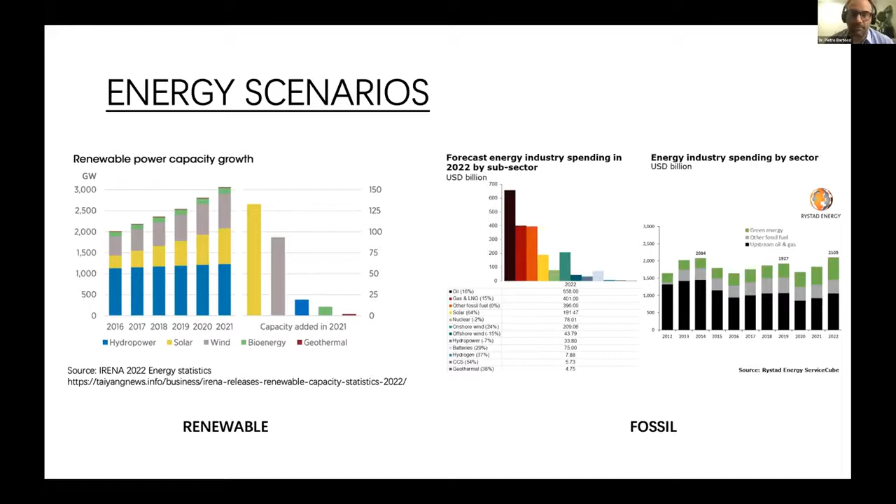For this reason, carbon capture and storage could be a good solution to allow us to transition to new energy sources, while keeping some of the plants we have, as we will see in the first case study I will present. The natural gas combined cycle plants in Italy are a big reality—they are responsible for producing a great part of the energy in Italy at the moment, so it's difficult to replace this in a very short time.

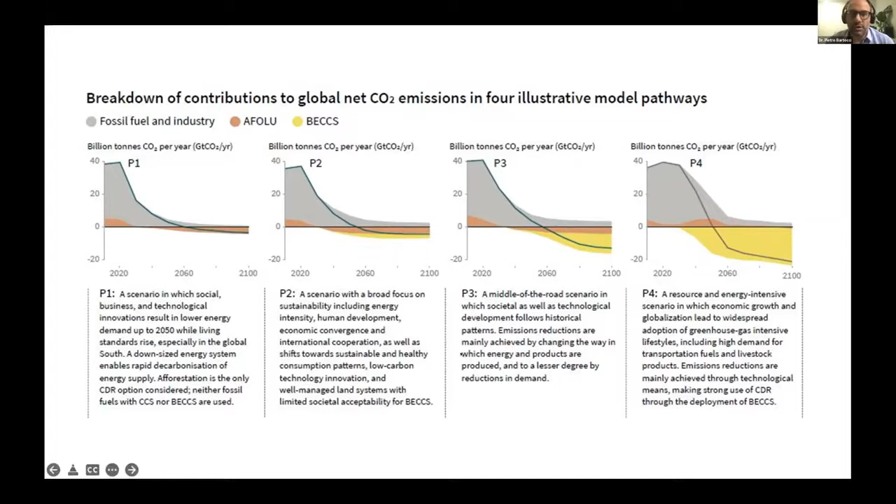Together with carbon capture and storage, we introduce also the topic of carbon negative technologies. Bioenergy with carbon capture and storage is a carbon negative technology, highlighted and promoted by the IPCC reports. The main advantage is that it could allow us to use current technologies working with fossil fuels and still achieve the net carbon emissions targets pledged by many countries.

We have many other different carbon negative technologies. This one is mainly based on the absorption of CO2 from biomass during photosynthesis. When biomass or biofuels, after a conversion step, are converted into energy mainly by combustion in thermochemical power plants, we can store the CO2 underground, achieving net negative emissions. This is the main concept of the technology.

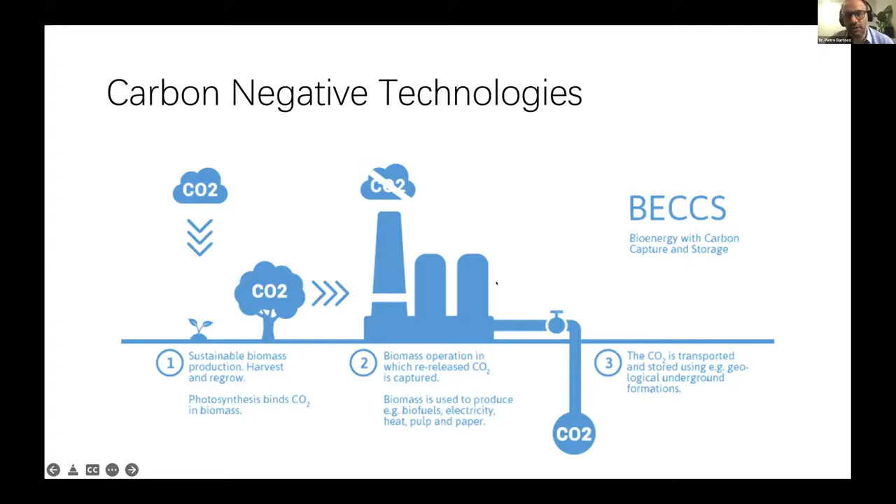As I said, developing this carbon negative combustor required starting with activities we developed at the University of Perugia in Italy with Baker Hughes. Baker Hughes has a quite big production site in Florence, Italy, where they produce turbines with capacities of 12 and 16 megawatts, which we think are more suitable for bioenergy or biomass, because biomass is dispersed across the territory, so we cannot build very big power plants—we have to focus more on decentralized power plants.

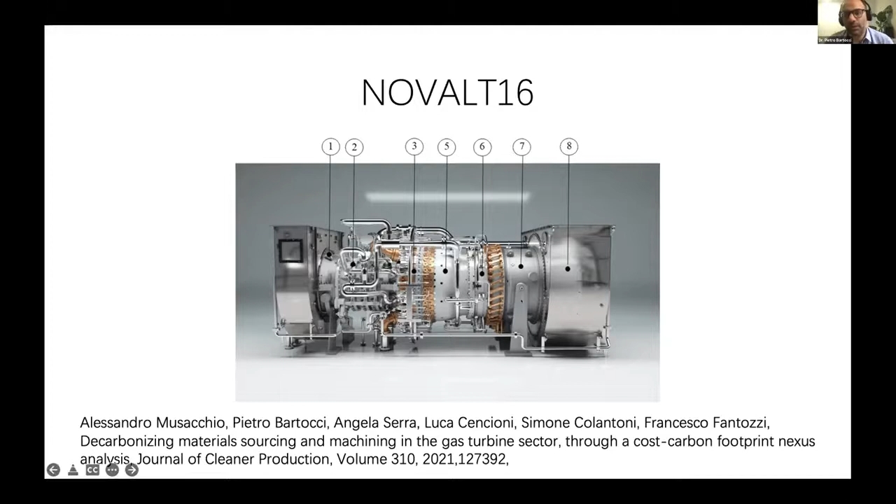With Baker Hughes, we were responsible for tracing all the carbon emissions in the production of raw materials used for gas turbine production, mainly steel, different alloys, and other materials. Together with the company, we started analyzing what happens, since this is a multinational company with a big supply chain—what happens if the supplier of raw materials like steel is a developing country?

And what happens if it is a country with a low carbon footprint in its energy mix—electricity or heat produced with fewer emissions? Here in white we see the emissions correlated with steel production if it's done in Europe, for example, and the black bars could represent developing countries like China and India. The company wanted to know the carbon footprint for all the raw materials.

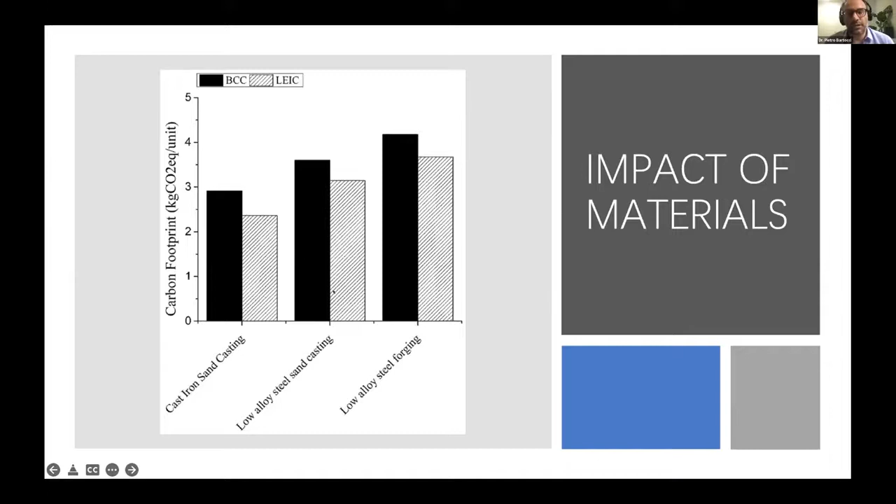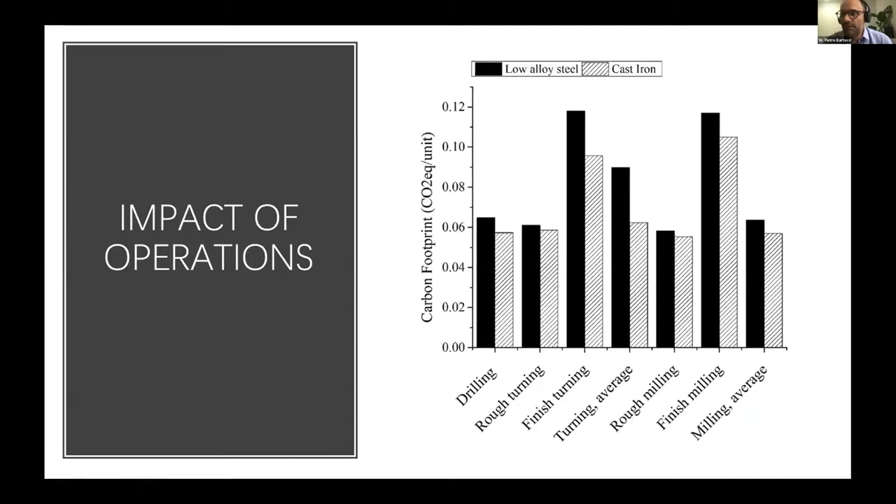Then we developed the carbon footprint for all the operations happening at the Florence plant. In the end, we obtained results showing the different carbon footprints of the different components of the gas turbine, which allowed the company to perform certification of the carbon footprint for the production of two models of gas turbines.

Here we have to explain some aspects better. First, as we know, the carbon footprint of a gas turbine is not focused on production—production is a small portion of the total gas turbine carbon footprint. As we know, the biggest proportion comes from burning the fuel, so it's the new fuel that we have to address. And as we know, the gas turbine sector is mainly shifting to hydrogen.

to achieve net carbon emissions targets. The technology we propose will have to compete on the market with hydrogen, for example, and also oxy-fuel combustion, because there are trends now suggesting that if green hydrogen is produced massively with green electricity and electrolyzers, we will have a huge flow of oxygen as a byproduct of hydrogen production. This oxygen could then be used in oxy-fuel combustion.

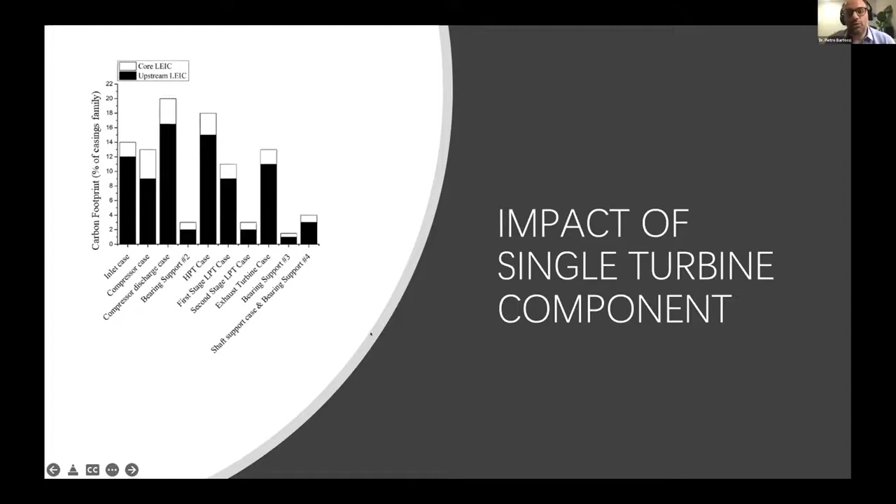We are well aware that the technology we propose should fight to find a niche in the energy transition market where other technologies are also developing. We are also aware that the decarbonization of the oil and gas industry is passing for sure through the use of LCA. For example, other companies like Siemens Energy are adopting it on a large scale. So we think that this work could lead to good results also in the selection of the most interesting technologies.

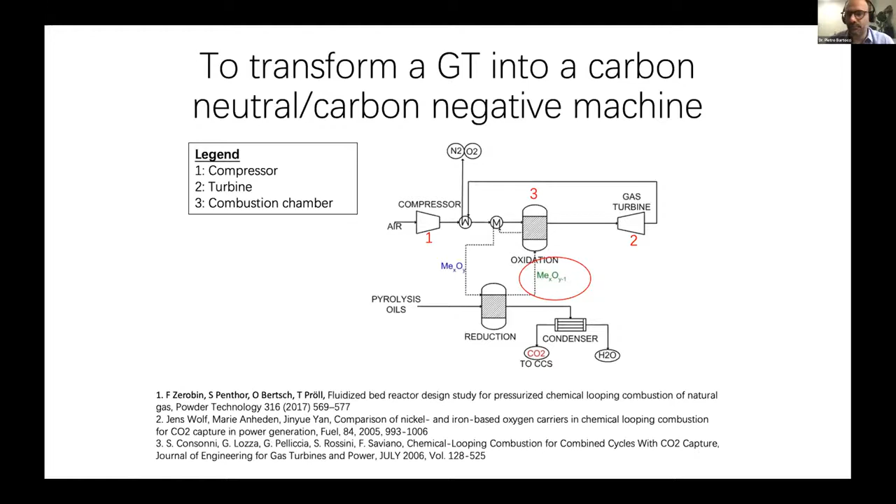Here we see also a former publication of Dr. Wolf and Dr. Yan, who is chair of this conference, by the way, already in 2005. And also a publication of Milan Polytechnic University. So here, for example, is the scheme which was firstly proposed by Dr. Wolf and Dr. Yan. And we know there is ongoing research also at MIT, because given that this conference is at MIT, I thought it was interesting to show the publication of 2018 in Applied Energy, proposing such a similar technology.

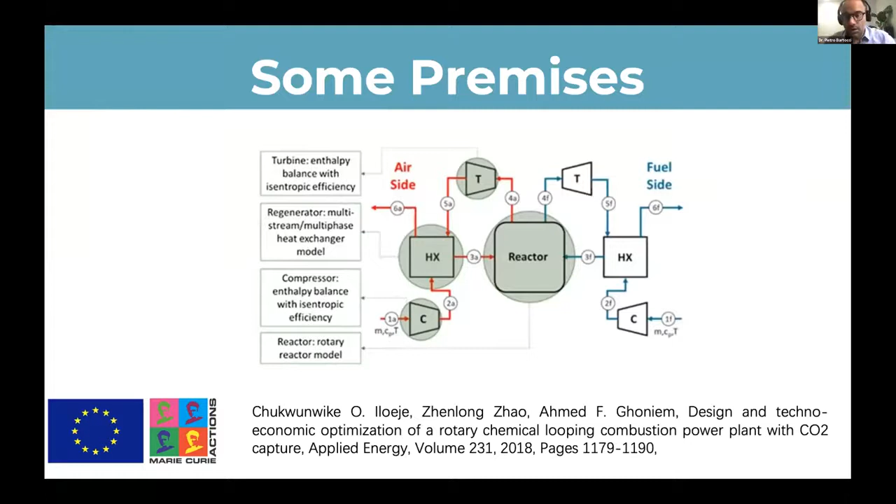Mainly in the case of MIT, a rotating reactor was proposed. So mainly from the point of view of the chemical looping combustor, it was more compact, and maybe it could reduce the investment costs. So why is there need of another project?

So these technologies have anyway some technical barriers that have to be overcome. For sure, we need more efficient oxygen carriers. So as we will see, the oxygen carrier is what transports the oxygen from air to the fuel for the oxidation.

And there is much research ongoing on this, also testing molecular dynamics and all the mechanisms possible to optimize its working conditions. Also, the oxygen carriers need to have low attrition. So during the process, which is happening in most cases in fluidized bed reactors, we don't want the oxygen carrier to produce dust.

Also, because this dust is very probably going to be found in the gas turbine, and this is barrier number 4, I think.

Then, from my point of view, the most important barrier is that if we need a chemical looping combustor to be coupled to a gas turbine, we need to operate the combustor at high pressure, let's say from 10 to 12 bars, and high temperature, maybe 1200 degrees. And here we have issues both with the material of the reactor, that we will see after a few slides, but also with the oxygen carrier, because if we use copper, for example, we know that this copper could give agglomeration inside the fluidized bed.

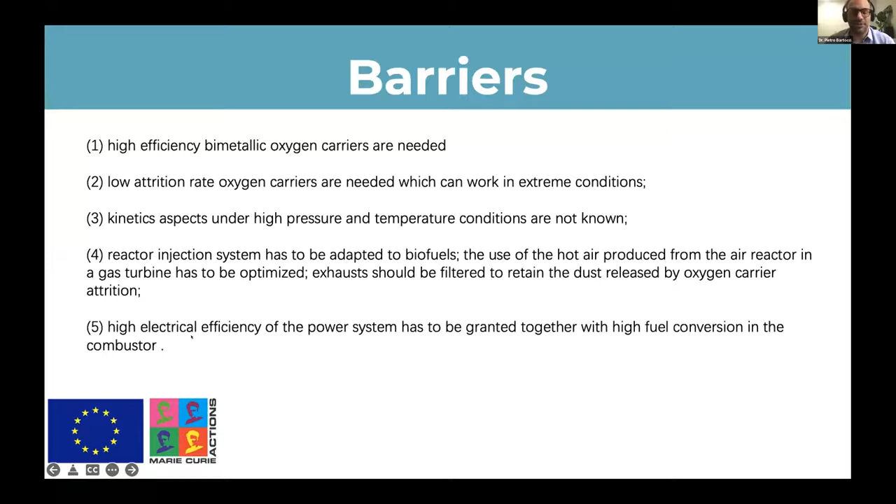Then the major problem is electrical efficiency, but we can maybe discuss this after the presentation, because electrical efficiency is very important for fossil fuels, since we have to spare them. But if we do a carbon negative technology, this means that the more fuel we use, the more CO2 we have absorbed by the atmosphere during photosynthesis. So we can discuss the importance of efficiency. Maybe this could be balanced by the importance of the return on investment, let's say.

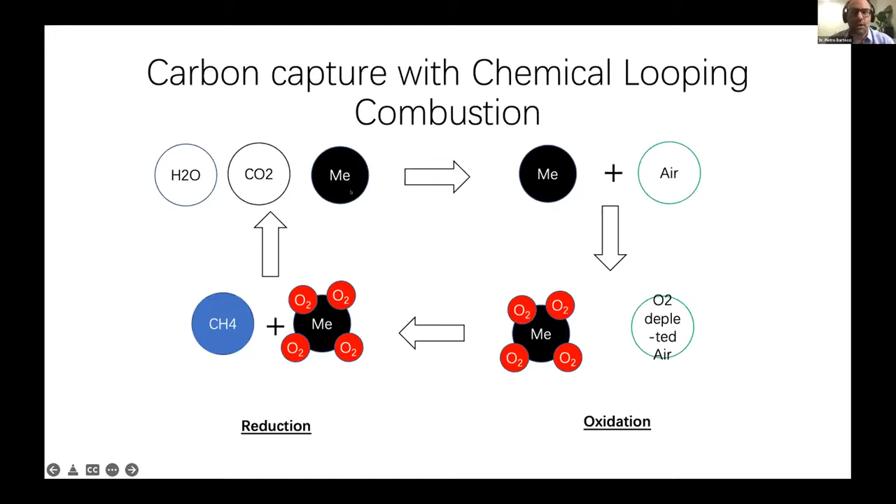So coming to chemical looping combustion, this is a combustion which does not use air. It uses a metal oxide, which provides oxygen to oxidize the fuel, and so it produces a pure flow of CO2 and water, which are the products of combustion, without the nitrogen coming from air. And so we can separate CO2 from water by water condensation and have a pure flow of CO2, which can be captured at very low cost.

So first of all, we made an analysis before presenting the project based on Italy energy scenarios. I said that Italy is deeply focused on combined cycles. And we have some national energy strategies which propose an increase of renewable energy, but show that these natural gas plants will remain, I think, for at least the next 10 to 15 years.

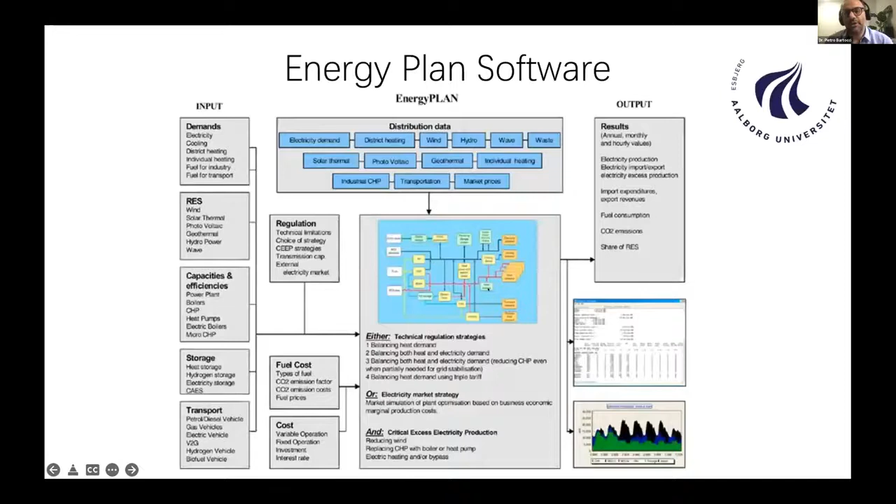So we have made different scenarios using energy plan software developed by Aalborg University. And mainly the energy scenarios were validated on the targets of the Italian energy policy up to 2030. Obviously, this changes quickly. Mainly the policy documents are from before the Green Deal, so we can see that maybe this will change a little, also depending on geopolitical issues about natural gas supply, but it's very probable that our natural gas supply power plants will still be quite important.

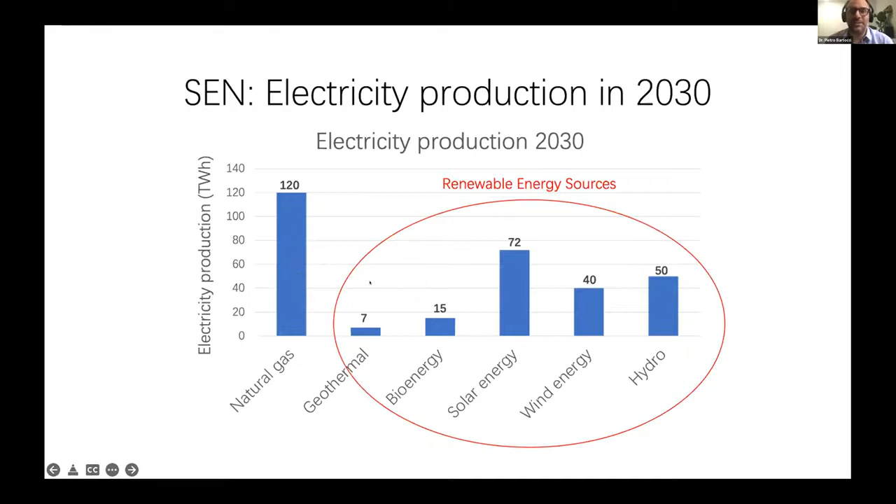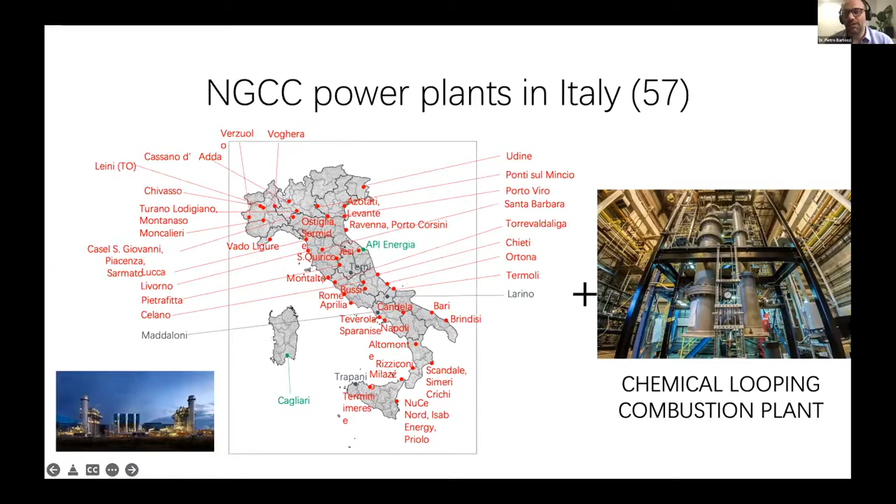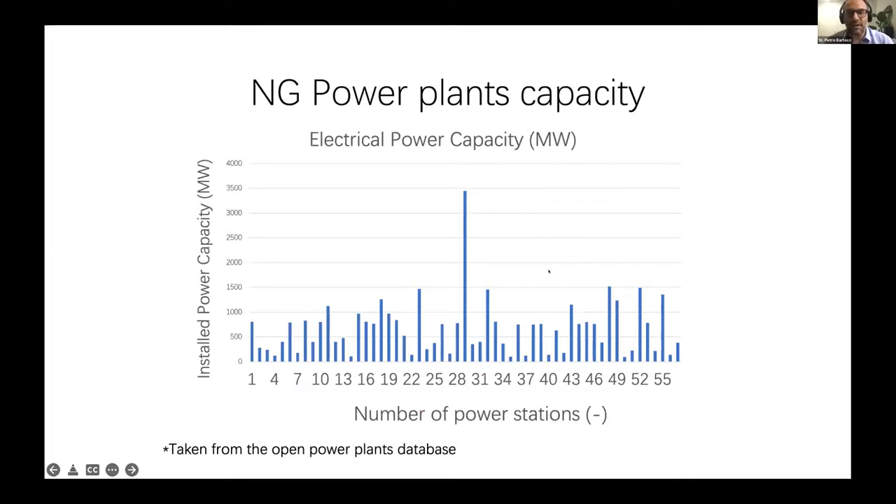These are our 57 natural gas plants, all in Italy. And our first feasibility study wanted to know what happens if these plants are substituted with a combustor, only the combustion part, which is a chemical looping combustor. This is an example of the combustor, the one developed by the National Energy Technology Laboratory. So these are the power capacities of the plants, the combined cycles in Italy, and this is the electricity generation.

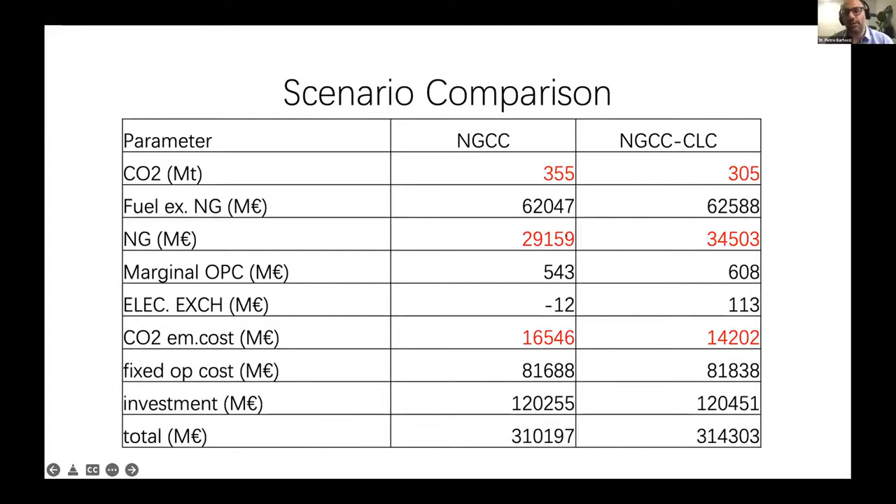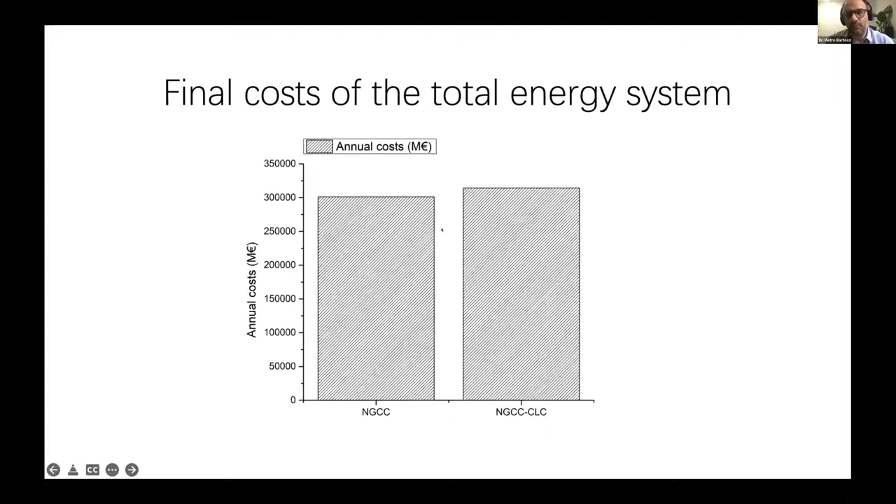What we calculated mainly is how much the CO2 emissions can be reduced and how much it could cost, how much would be the investment to upgrade our current energy system. And you see that the total investment, even if we speak about millions of euros, is not so high if we compare it to

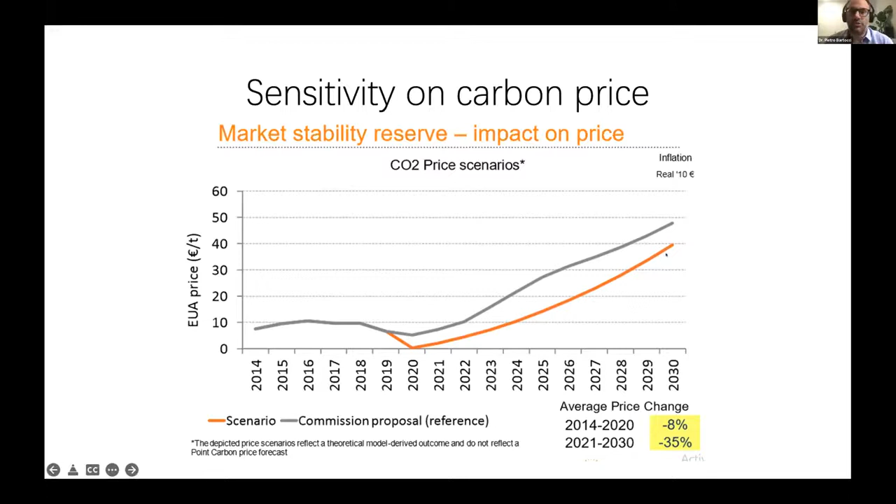the existing energy system now. Obviously, this depends on the carbon price. These were estimates for 2030 that said we would arrive at 50 euros per ton, but we are already at almost the double. So if we consider the carbon credit value, we could see that business as usual, which is orange, could be very similar as an expense in investment and operating costs

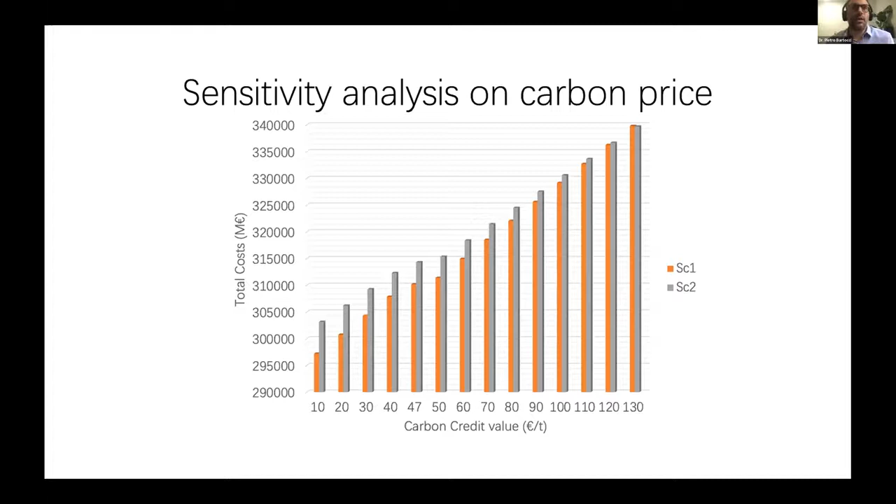compared to the new proposed scenario. This is to say that instead of changing completely the energy mix of Italy, introducing a massive introduction of renewable energy, we can upgrade our natural gas plants in a way that they are carbon neutral. If we use biomass or some fuels, mainly biofuels, this technology can be even carbon negative.

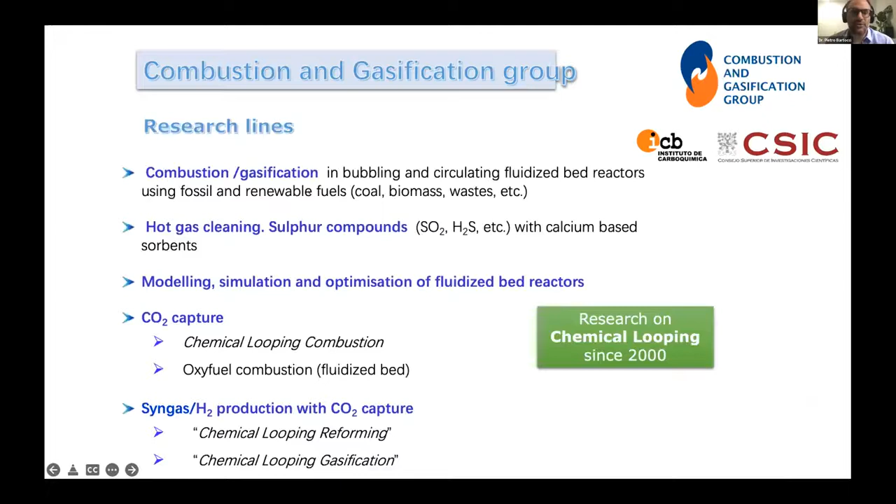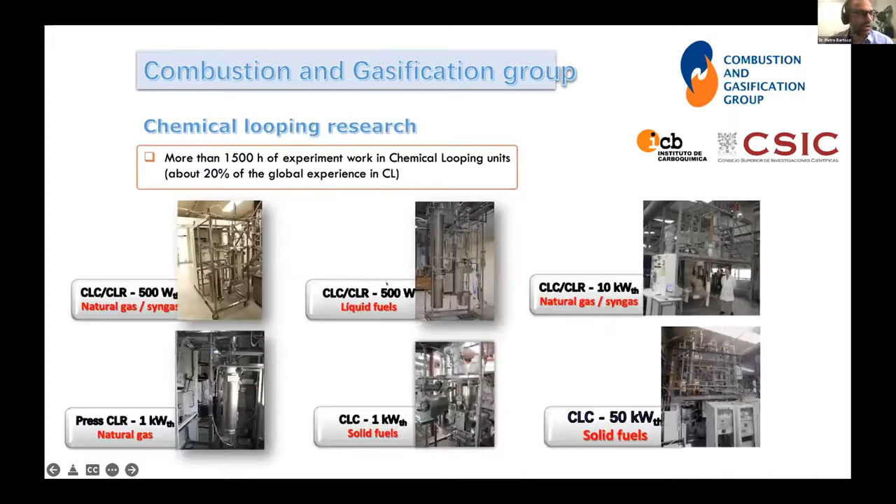So to develop this combustor, I went to Spain. Here is Zaragoza, and our center is mainly focused on combustion and gasification. We prepare the oxygen carrier, we test it in plants, and we do scaling and optimization. These are the batch reactor and the continuous reactor that we have. This I already explained, the plant. And the project is based on the preparation, characterization of the oxygen carrier, batch tests, modeling, and continuous pilot tests.

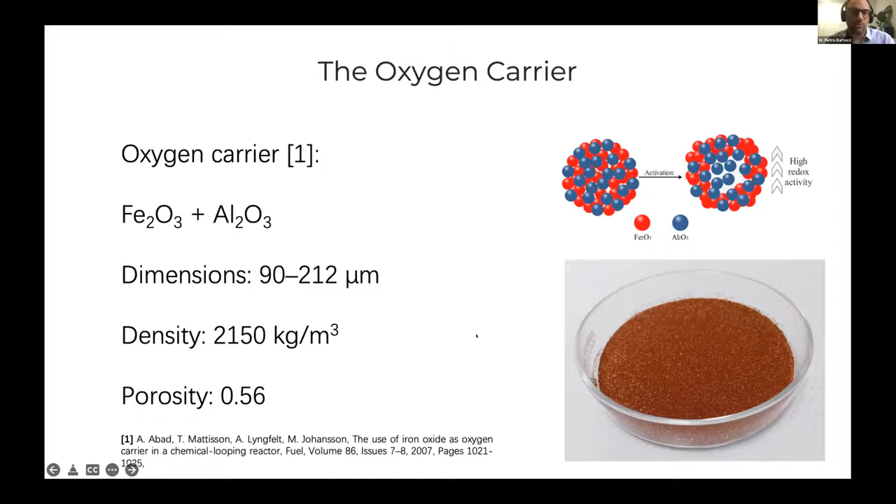So compared to the literature, which was mostly focused on Aspen theoretical studies, we do proper modeling and an experimental campaign to see if this technology can work at high pressure and high temperature. We can say that chemical looping combustors working at high pressure are very few at the moment. There is only one project in Canada working on such a combustor, and another project in Norway.

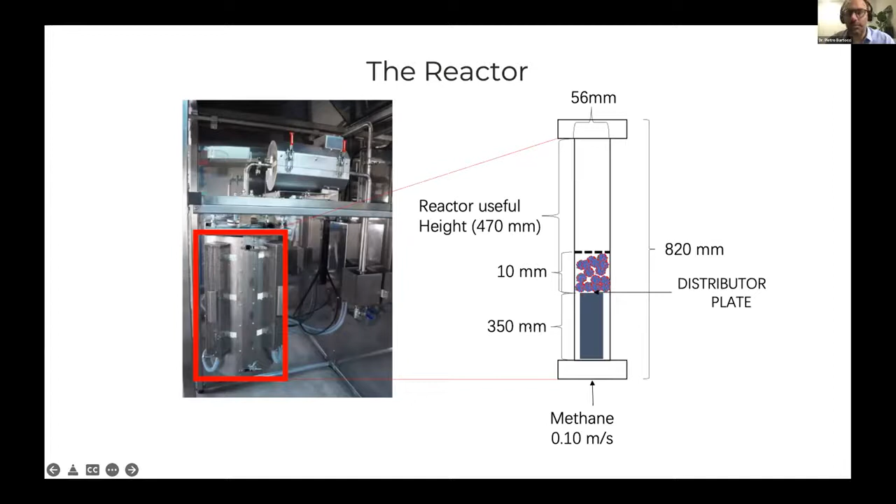So we want to bring more data from a scientific point of view. This is the model we are developing with the MFIX software, developed by the National Energy Technology Laboratory at Morgantown, and NETL is part of the DOE. And this is the modeling platform with the kinetics, which is done in a pressurized condition with the PTGA.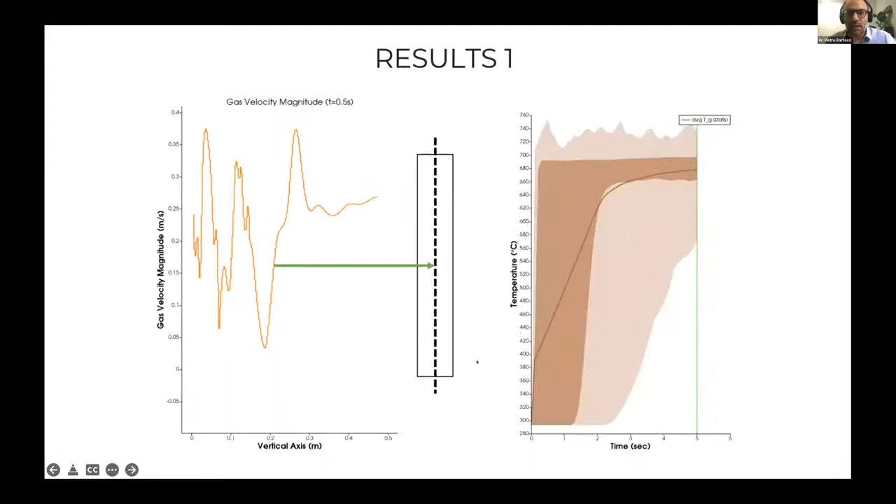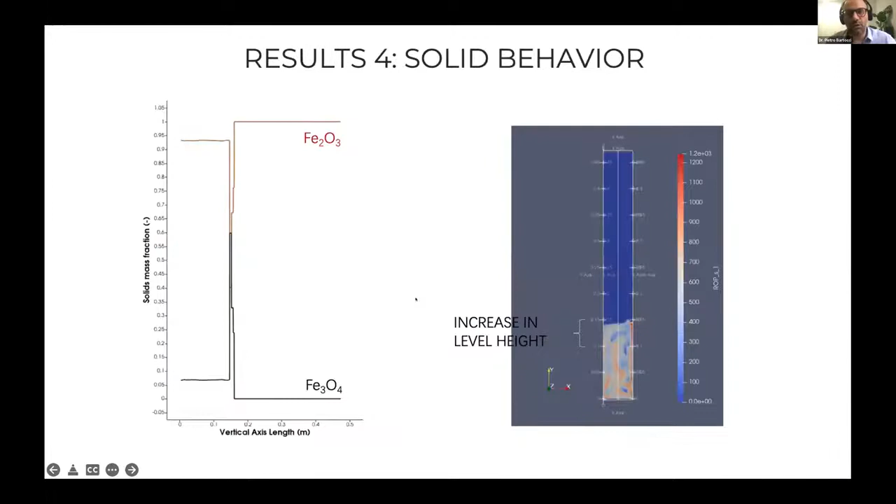And these are some results: the production of gases, how the reactor works, and how the oxygen carrier is converted. The most important result, maybe, is to see more or less how the process works.

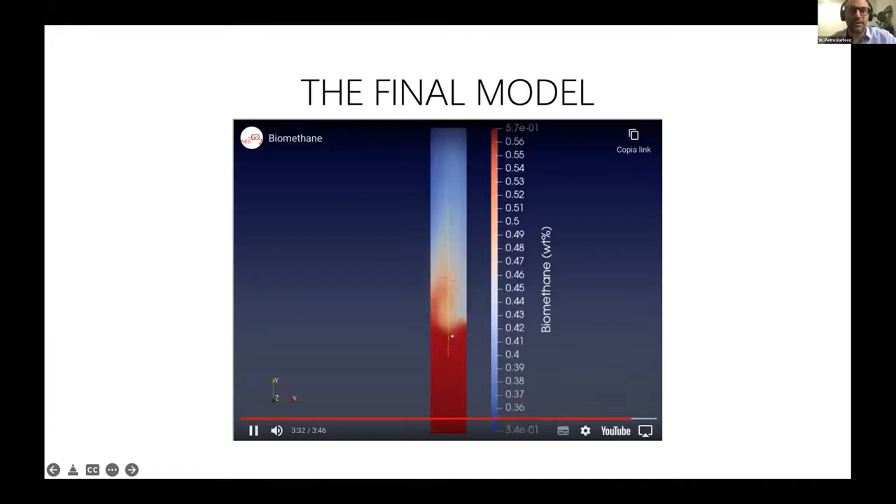This is biomethane coming inside the reactor, and we see how it turns directly into CO2 and water. What we can see is that at around 3 minutes and 20 seconds, the reaction path changes completely. So what we are now doing is analyzing one cycle of reduction, to know how long it lasts, and to fully validate our kinetics scheme.

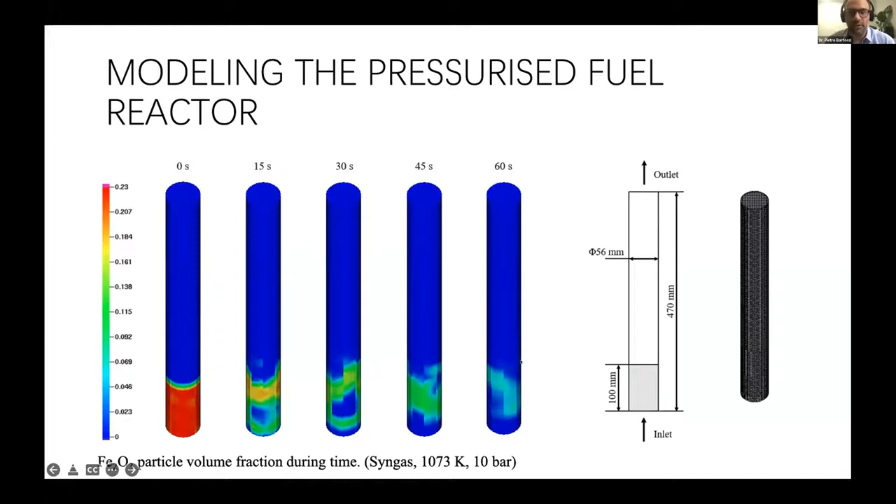The simulation was also done with Huazhong University of Science and Technology. This is our latest work, which was presented at the International Applied Energy Conference 2021. And we validated the model with syngas at pressurized conditions.

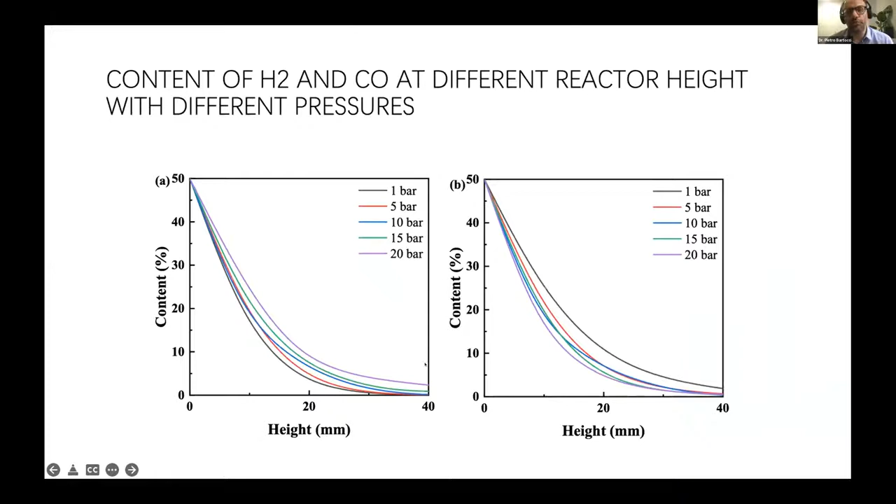So what happens is that during the reaction, we have hydrogen and CO, contained in the syngas, that get consumed because they react at different rates depending on pressure. And this was also analyzed at different temperatures.

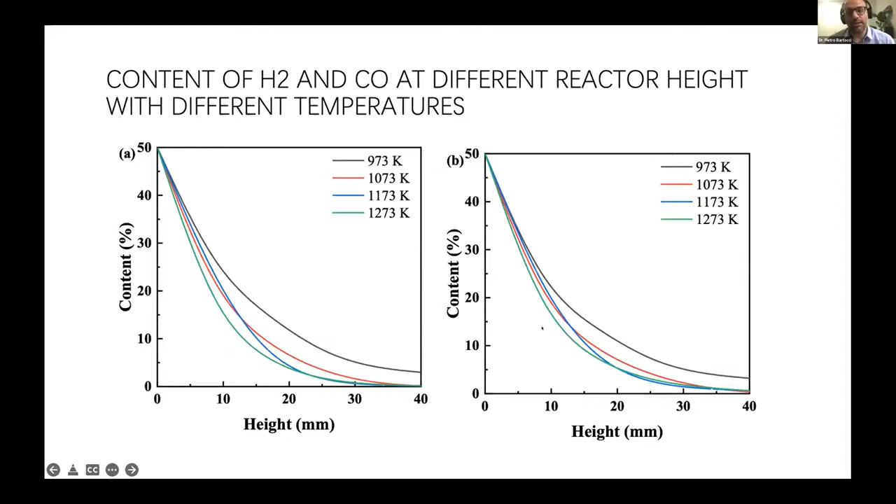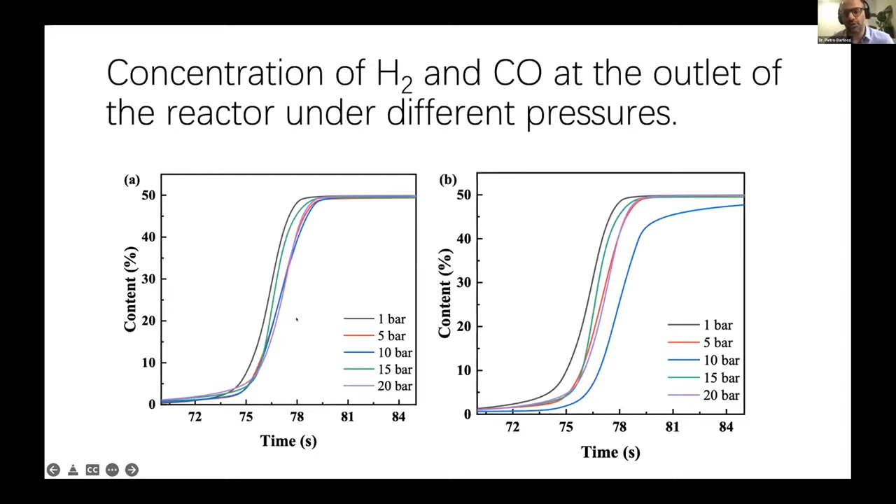Here, over time, we see that the fuel doesn't react anymore. So in this case as well, we analyzed the cycle of reduction and how much time is needed for the oxygen carrier to become exhausted. It is spent.

Our final conclusion on the pressurized model of the batch reactor is that, as was already seen through pressurized TGA tests, the hydrogen reaction in the syngas is very quick. The CO is mostly influenced by pressure, and for hydrogen there's a pressure of 10 bars where the kinetics seem to slow a bit. In principle, we can say that syngas behaves as the sum of the kinetics of carbon monoxide and hydrogen.

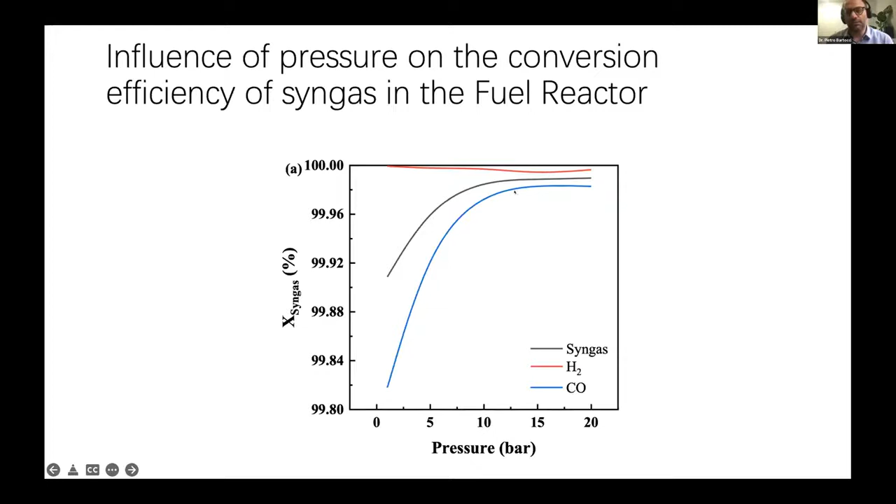From this data, we calculated the solids inventory necessary for our fuel reactor, which is a batch reactor, a fluidized bed. And we discovered an opposite trend from what we expected, because the effect of pressure on the kinetics is mainly to slow the reaction. So if we increase pressure, the kinetics gets slower.

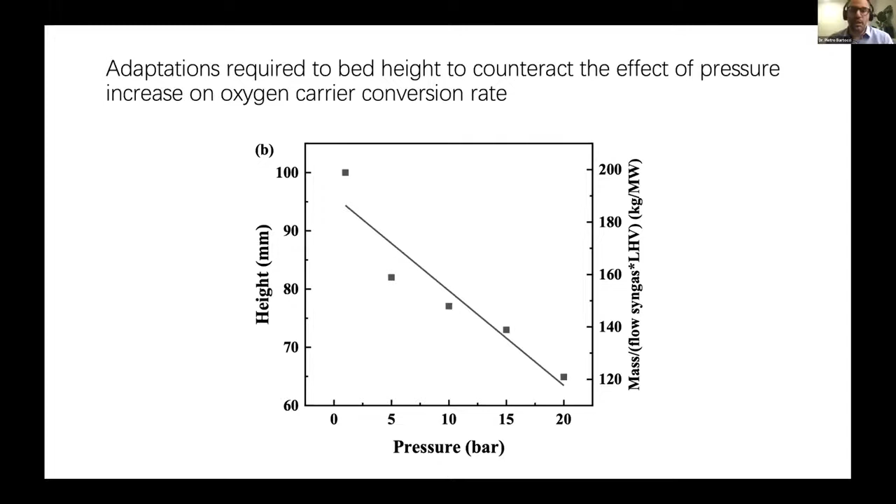This is what was seen in pressurized TGA tests, while in this case, when we also consider fluidization and the effect of pressure on the fluidization of the bed, we see an effect that improves heat exchange, and the heat exchange also affects the reaction itself. So it balances out the kinetics, which is slow. This is at least what we saw from these models, and we are going to further analyze this on an experimental scale.

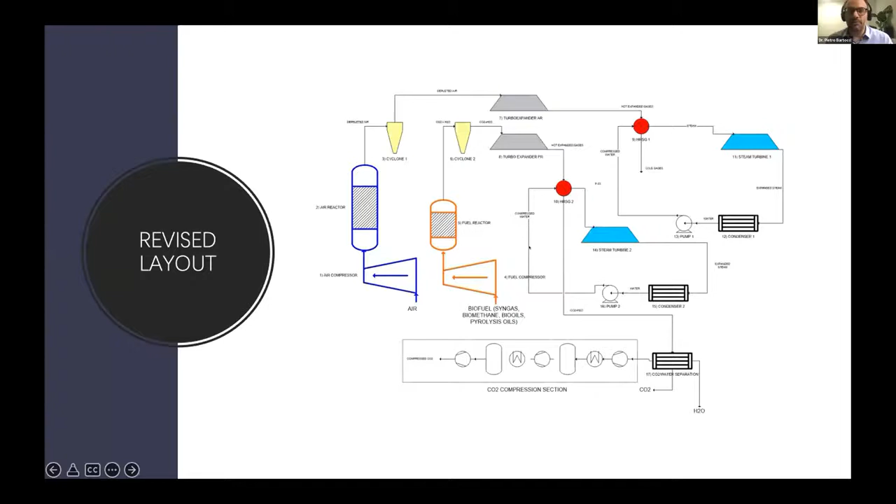This is the final plant that we want to propose, which is quite similar to the previous one. We are optimizing it with different software platforms, so not only Aspen, but also CFD modeling.

What we tried to develop is a procedure to design such combustors. While these combustors are usually designed based on the primary energy, the power of the combustor, in this case we have shifted our interest to the gas turbine.

So we first choose a gas turbine, then we calculate the air mass flow that should pass into our combustor, and we calculate the fuel mass flow based on stoichiometric combustion chemistry. We calculated the oxygen carrier circulation rate, and so on, and slowly design all the plant.

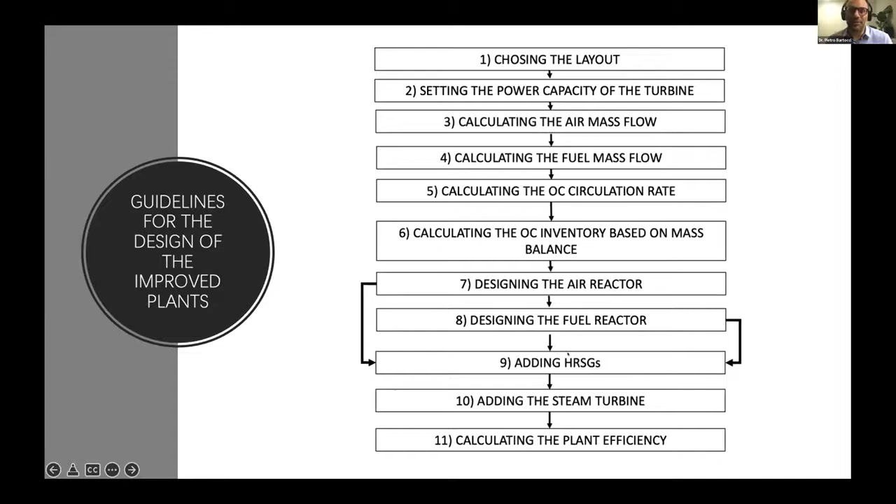This is a completely new methodology. We have also noticed that to optimize the whole plant, a key parameter is the excess air in the air reactor. If we increase this, for example, from 1.2 alpha to 3 times excess air, we have two positive effects.

One is that the excess air is going to cool the air reactor and provide the optimal temperature. The other is that we can maximize the power production at the turbine and reduce the use of fuel. So this is how we will make it.

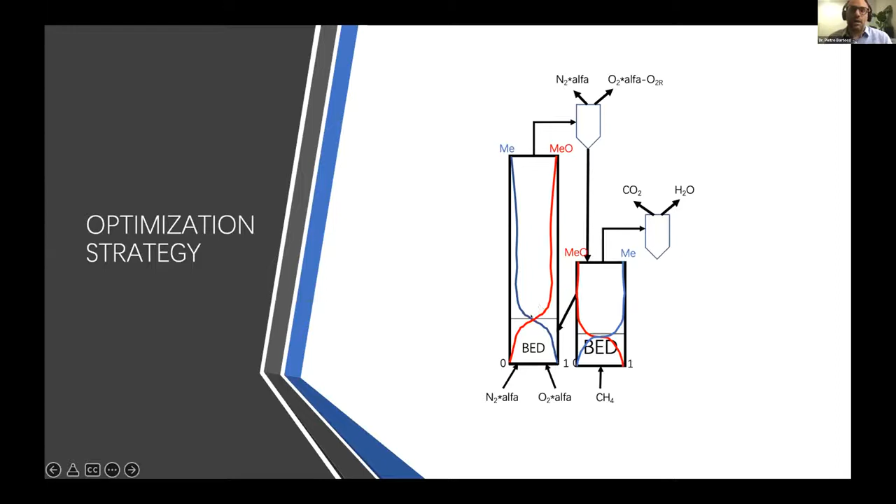Our Aspen optimization is mainly based on two equations, at the air reactor and at the fuel reactor. Obviously these are connected, so the heat for the fuel reactor, which has endothermic reactions, is provided by the air reactor. We can make these two terms equal, and in this way we have only one variable to optimize, which is the excess air, as I already said.

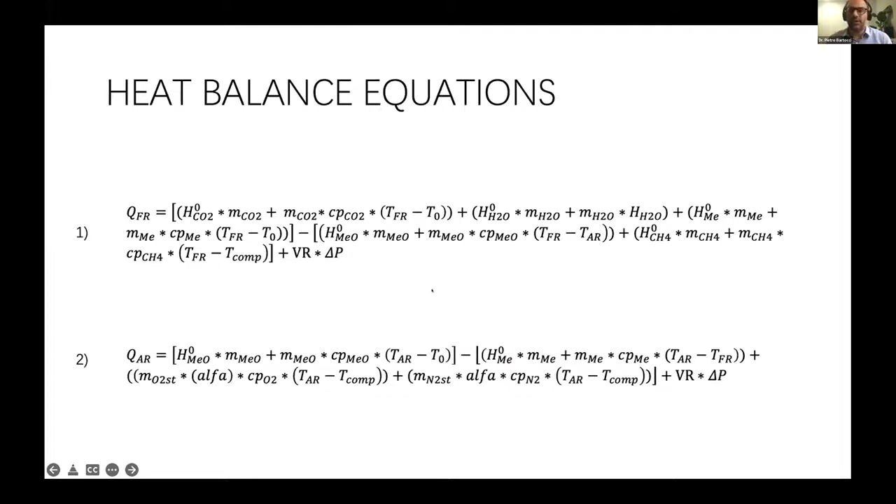These are shortly the conclusions. Mainly natural gas or biomethane has been tested in a model. Syngas also, and the behavior at pressurized conditions have been analyzed. In both cases, the kinetics were done already in TGA. I did not present the experiments, for clearness, to be clear and short.

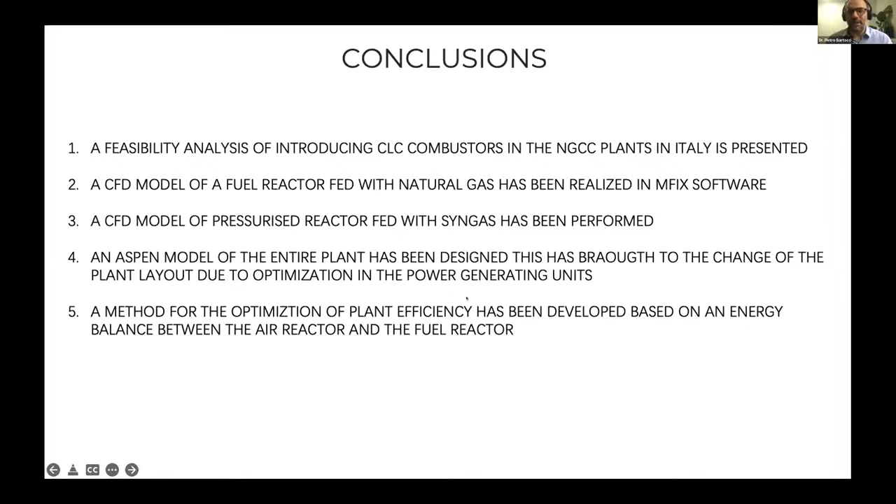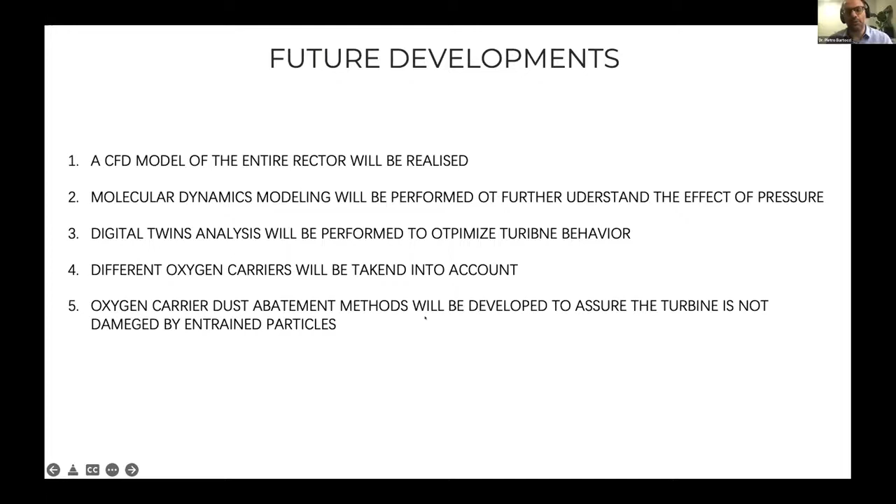And we developed a methodology to clarify how to design such plants. Surely the next future development will be economic analysis, because as I said, we have to compete with different technologies which are mainly in the spotlight. But we believe that this technology on bioenergy can be used on a small scale. So small scale could be our niche, and we believe we will find our place there.

I acknowledge the European Union for funding this project, and the Chalmers University who contributed in Sweden, giving feedback and experience on chemical looping combustion.

These are my contacts if further information is needed, and the project repository where you will find the latest results. I'll finish saying that in June 2023 there will be the Turbo Expo conference in Boston, the same city as this conference, and we will try to organize some sessions also here about this technology.